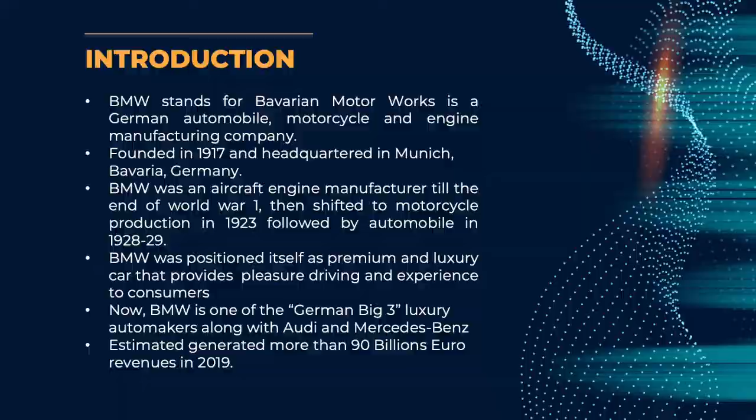BMW stands for Bavarian Motor Works, a German automobile, motorcycle and engine manufacturing company. It was founded in 1917 and is headquartered in Munich, Bavaria, Germany.

BMW was an aircraft engine manufacturer till the end of World War I, then shifted to motorcycle production in 1923, followed by automobiles in 1928. BMW positioned itself as a premium and luxury car brand that provides pleasure driving and experience to consumers.

Now, BMW is one of the German big three luxury automakers along with Audi and Mercedes-Benz, and is estimated to have generated more than 90 billion euros in revenue in 2019.

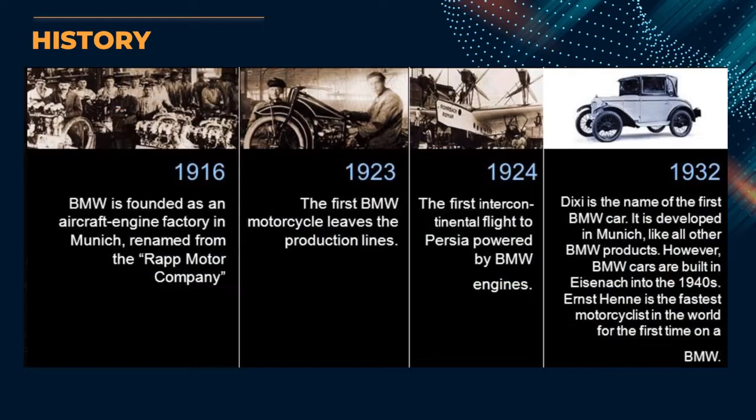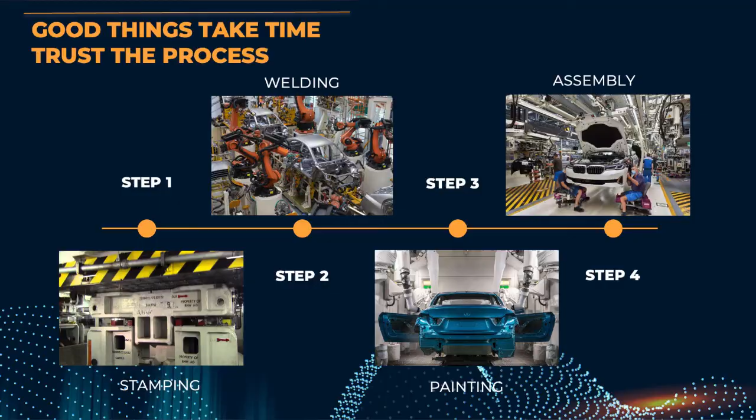The press shop marks the beginning of an automotive production process. Here, the sheet metal parts for the bodywork are cut precisely and stamped by a mechanical press.

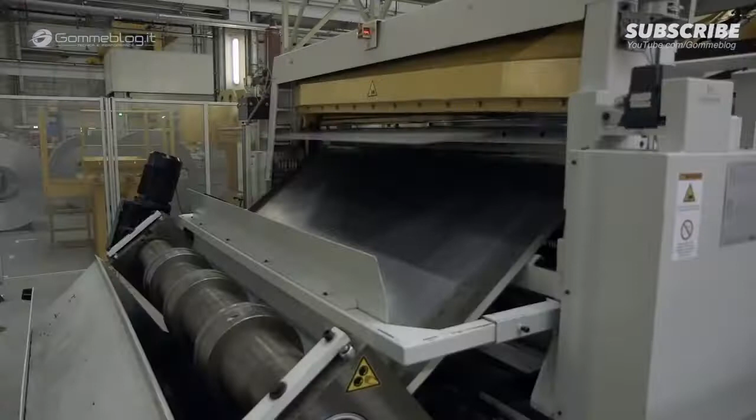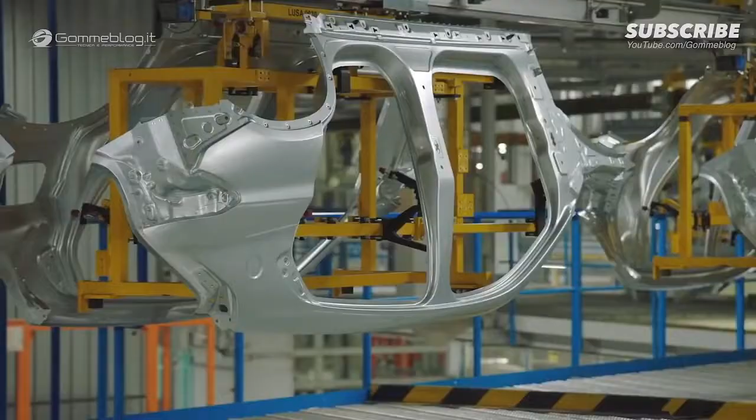These parts will form side frames, doors, hoods and roofs, which are later added into the main frame of the car. Once the frame is created and the parts are ready to be assembled, the car will be loaded into a production line.

As the car travels along a moving assembly line, robots attach parts to the car using manufacturing techniques such as welding, soldering, screwing and gluing. This process takes almost 18 hours to complete.

Next, the car frame will undergo a detailing process. This includes cleaning, layering chemical formulas, and painting for protection against corrosion and scratches.

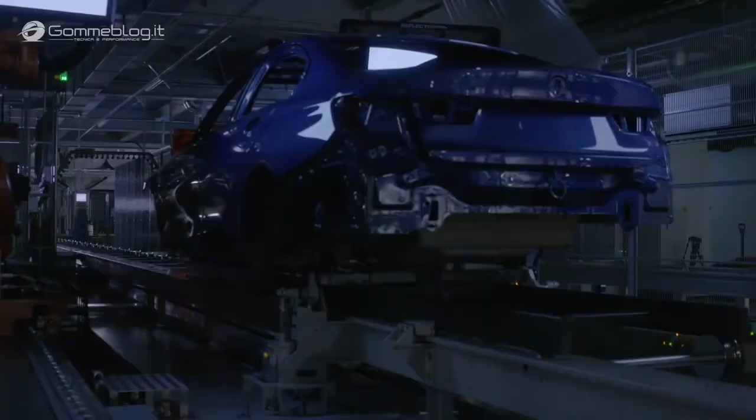Before the final stage of production, the car frame will undergo quality control to make sure all standard requirements are met.

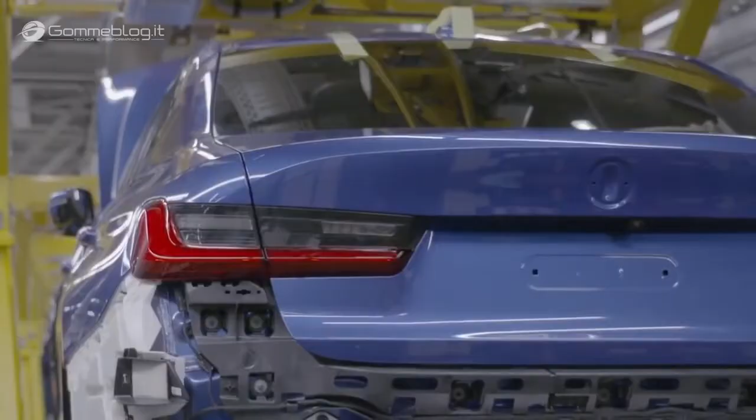The final process is assembly. Here, the major components are installed, such as the engine, seats, axle, exhaust system and many more.

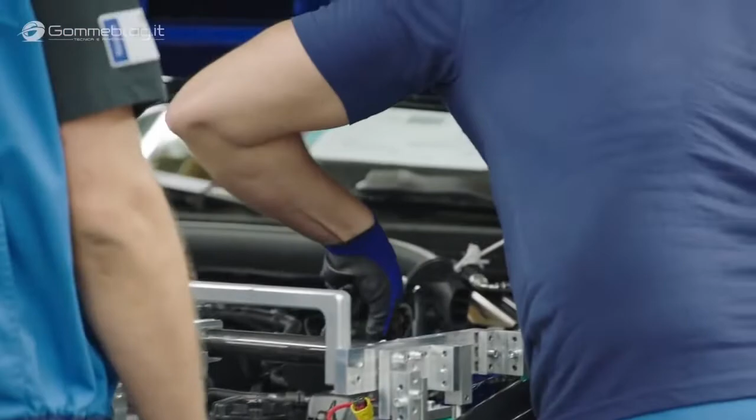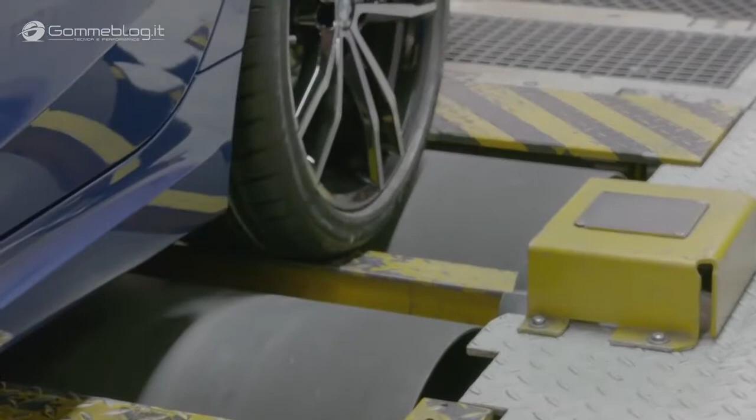Lastly, the car undergoes final quality control where every component is inspected, including minor details such as horn, light beams and others, before being released. The proverbial sheer driving pleasure is essentially determined by the end of this process.

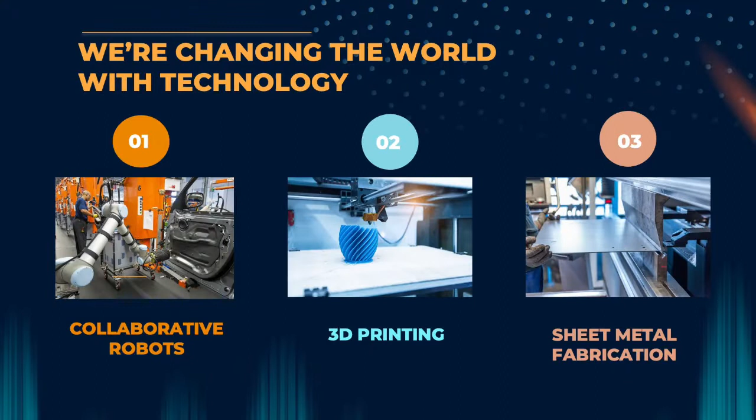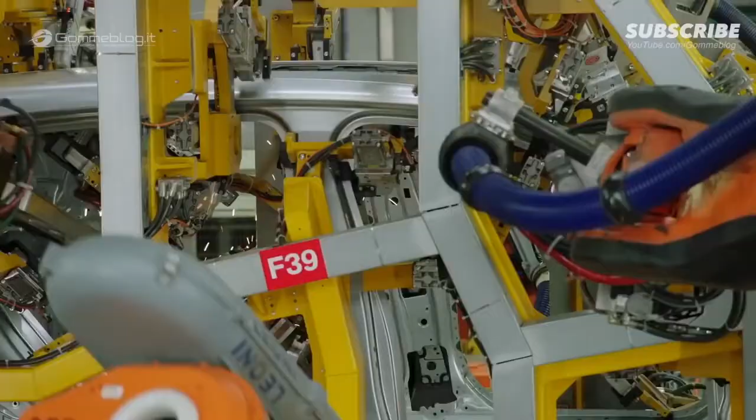One of the technologies employed in BMW manufacturing is the collaborative robot. Advantages of using collaborative robots are convenience and safety precaution for automotive manufacturing. Not only does it reduce manufacturing time, leading to lower production costs, but it also prevents human accidents while performing dangerous and heavy tasks.

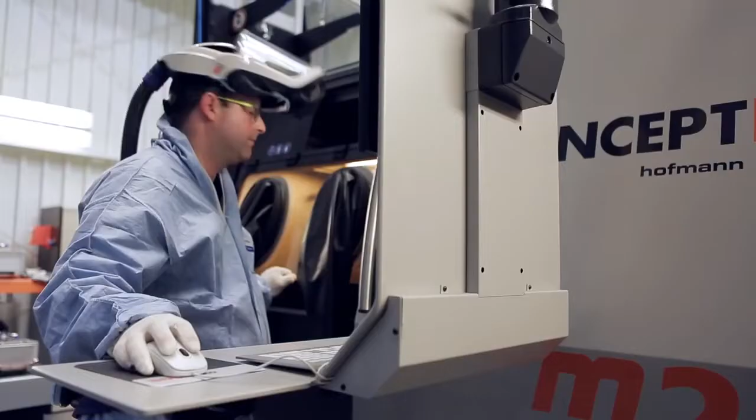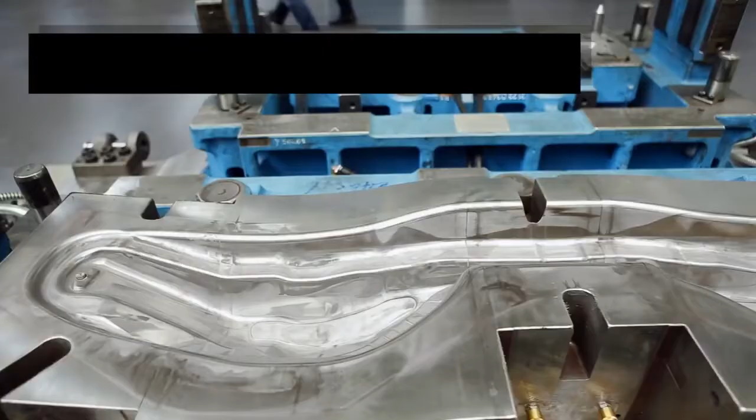Second is 3D printing. Additive manufacturing processes are used to create 3D printed objects. An object is created in an additive process by laying layer by layer until it is complete. Each of these layers can be seen as a cross-section of the object that has been thinly sliced.

Lastly, sheet metal fabrication. Sheet metal fabrication is used to turn flat aluminium or steel sheets into metal pieces or products by cutting, perforating, bending, and assembling.

This technology is automated and applied in car modification to sustain and satisfy customer needs. Sheet metal fabrication is used because of its plasticity and elasticity. Thus, by using this technology, it improves the performance and safety of the components.

The aim of BMW's design concept is consciously shaping a vehicle in such a way that this interplay creates an impact and dynamism.

The key concept of BMW car design is to create the ultimate driving machine. With that in mind, people are not only attracted to the BMW brand because they produce great cars, but also because of their way of doing things.

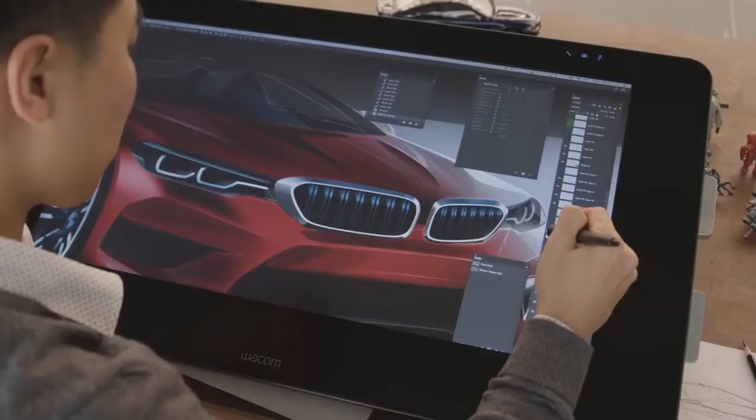What makes BMW exclusive and appealing lies in BMW's design concept, which is built for performance and longevity.

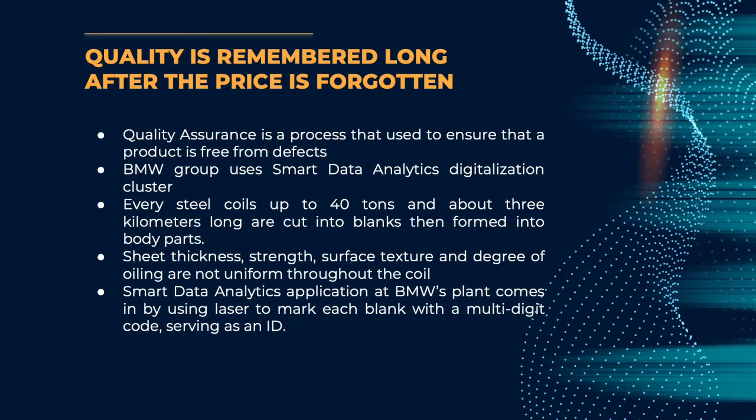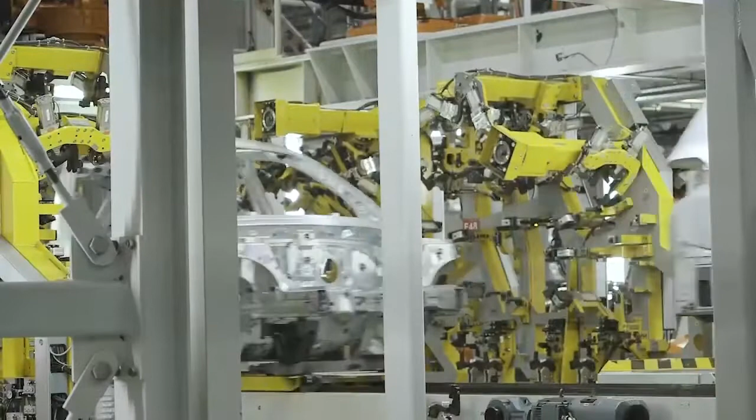Quality assurance is a process used to ensure that a product is free from defects. So, in BMW Group, to make sure that quality of a product is in top condition, they use smart data analytics digitalization clusters to analyze the data selectively and enhance its production system.

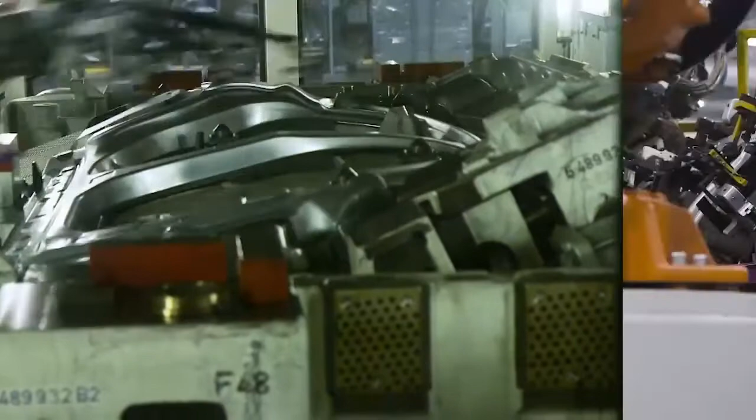The results of intelligent data analysis contribute significantly to the improvement of quality in all areas of production and logistics.

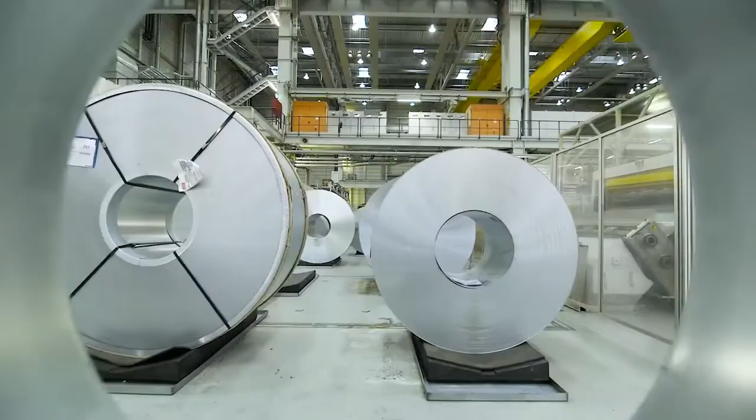For instance, in the pressing shop department, every steel coil, up to 40 tons and about 3 kilometers long, is cut into blanks, then formed into body parts.

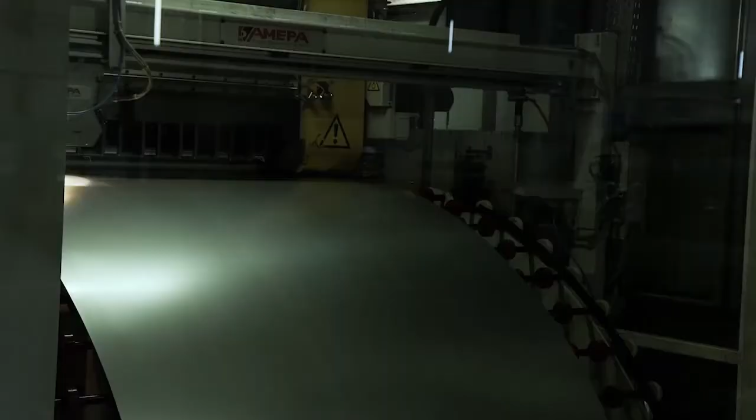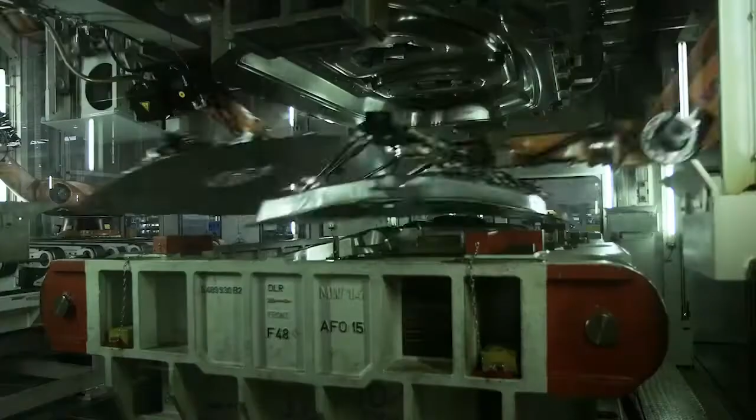However, sheet thickness, strength, surface texture, and degree of oiling are not uniform throughout the coil. As a result, deviations from the target can cause cracks in the body when they are put under a lot of stress during the forming process.

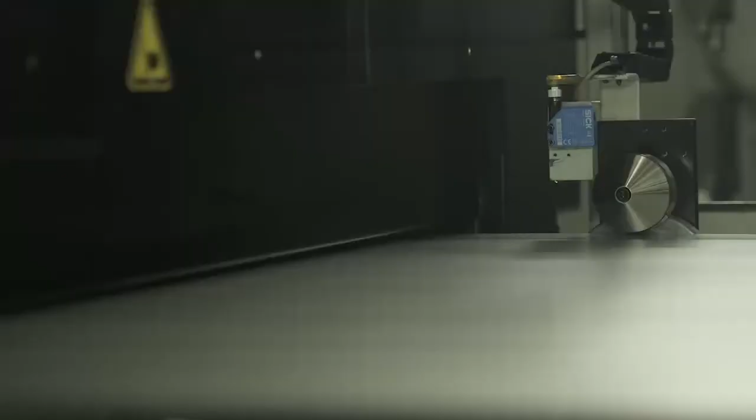Hence, this is where the smart data analytics application at BMW's plant comes in, using lasers to mark each blank with a multi-digit code serving as an ID.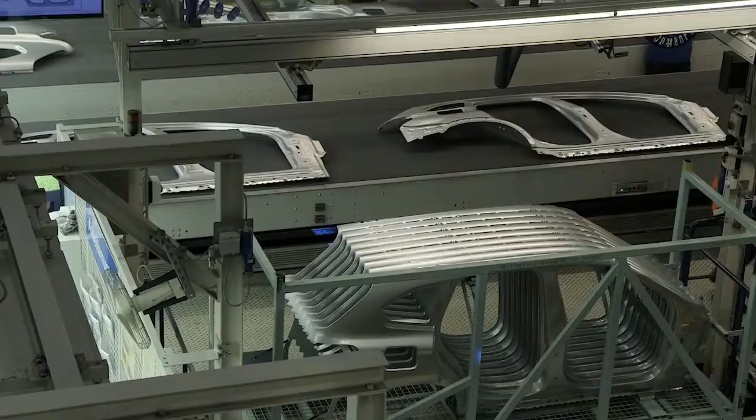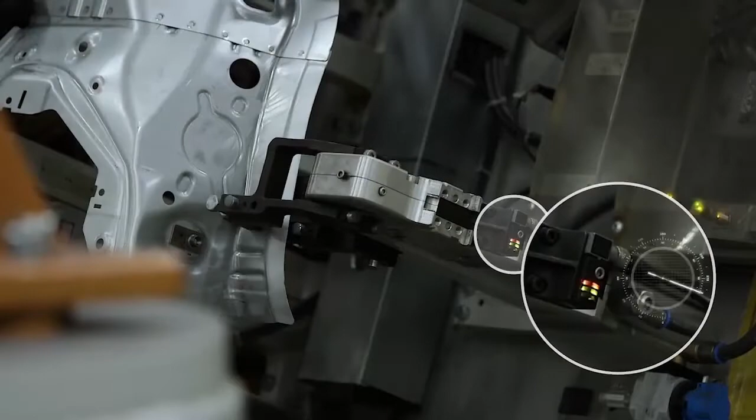The ID, which contains a control command, can instruct the machine to insert additional oiling to the blank before forming, if needed. So, by implementing smart data analytics, we can achieve quality assurance.

I would like to share some products that have been produced by BMW company, which is the BMW 7 Series sedan.

BMW 7 Series sedan stands for self-assured presence, exceptional performance and maximum comfort. The BMW 740LE, powered by a newly developed BMW TwinPower Turbo 6-cylinder petrol engine and with xDrive as standard, is quite simply created for assuming the leading position.

The emotive language of the elegant design, together with that special atmosphere of well-being in the interior, thanks to the supreme quality of detail, individual styling options and technical innovations, make it more of an epitome of the BMW luxury class. Smoothness meets exclusivity, luxury meets performance.

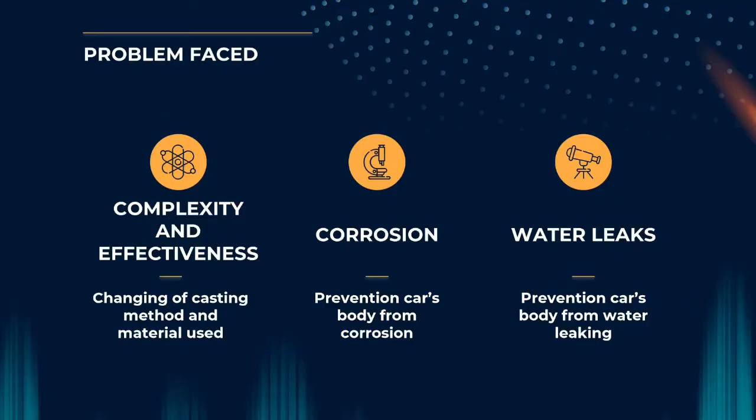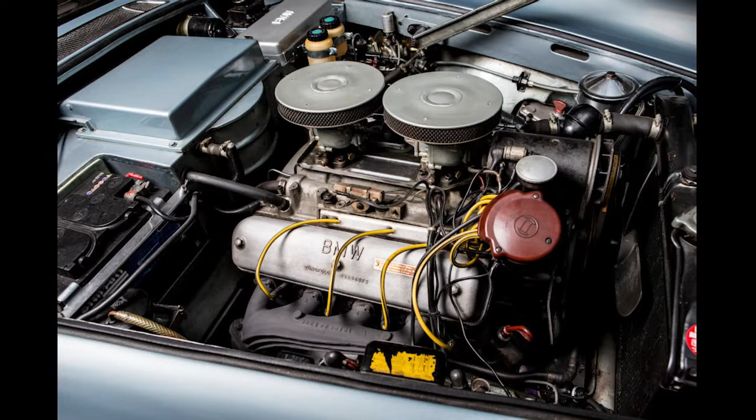So the first problem is complexity and effectiveness. As the technology becomes advanced, the engine specs also need to be upgraded to match the specifications needed. As for the weight of the engine, BMW needed to reduce the weight to achieve better overall vehicle weight. To do so, they reduced the volume of the engine components by hollowing certain sections, which resulted in increasing the complexity of the parts design.

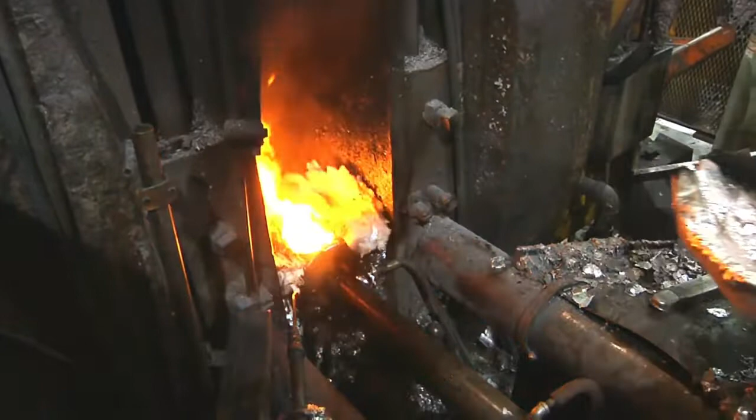At that time, they were using the die casting method to produce the engine's parts, but die casting is limited to a certain level of complexity, as we all know. They then changed the method and used sand casting to comply with the demanding design specifications.

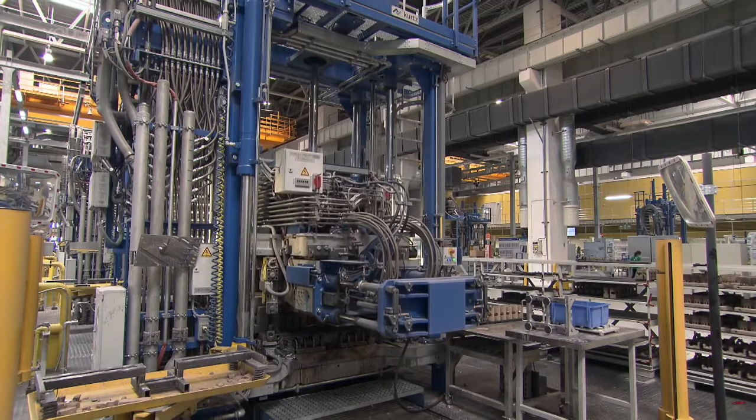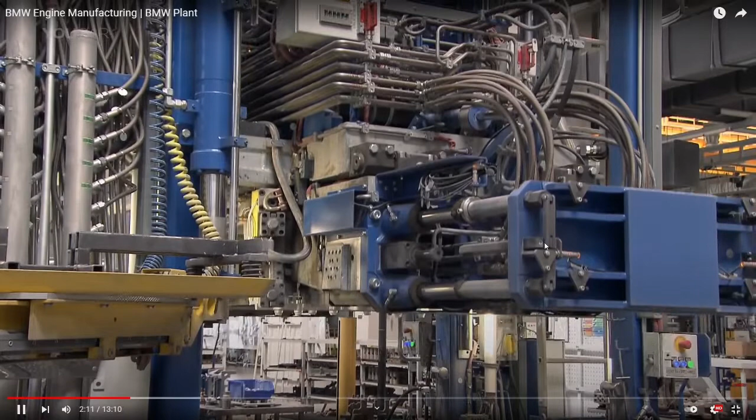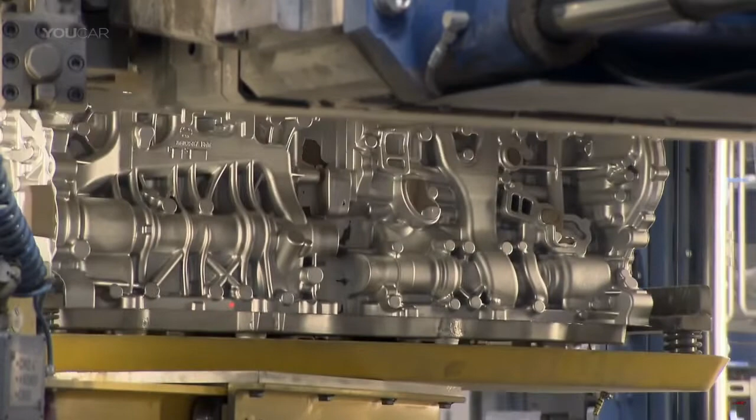Although sand casting is costlier than die casting, they can cover the issue as the finished product from sand casting needs much less machining. They also changed the material used for the engine block from grey cast iron alloy to aluminium alloy or magnesium aluminium alloy, for better characteristics in terms of internal stress, damping absorption, wear resistance, thermal conductivity, casting features, corrosion resistance, high strength, and rigidity.

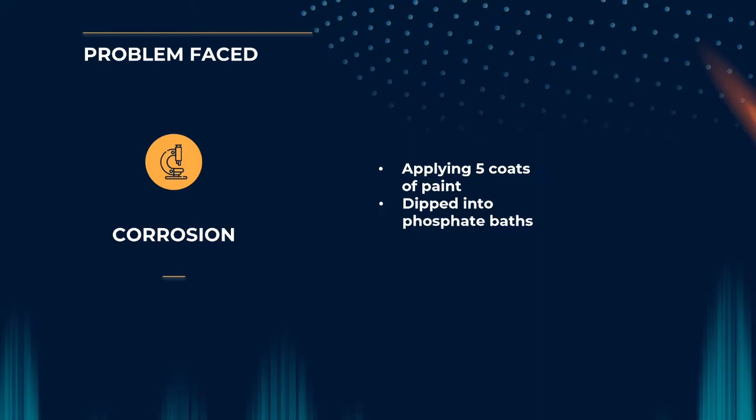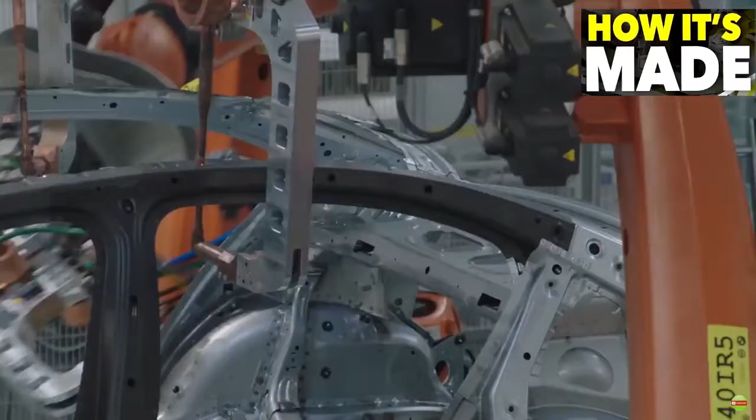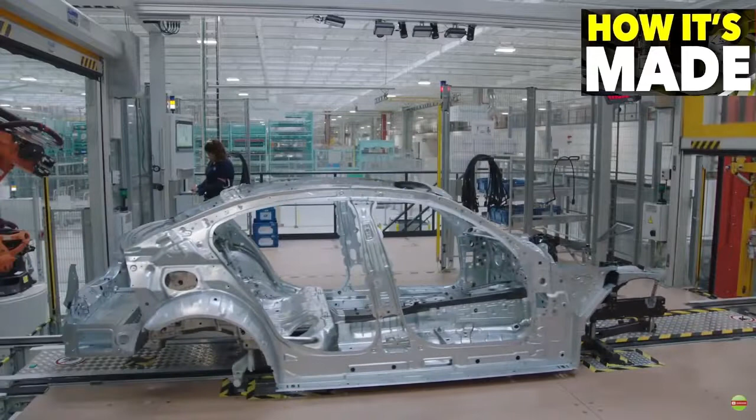We move on to the next problem. Our second problem is corrosion. As I mentioned before, when using metal compounds, the material has a high tendency to corrode depending on the compound used. For the engine, they use aluminium alloys and magnesium aluminium alloys, partly because they have better corrosion resistance than other compounds like grey cast iron alloys.

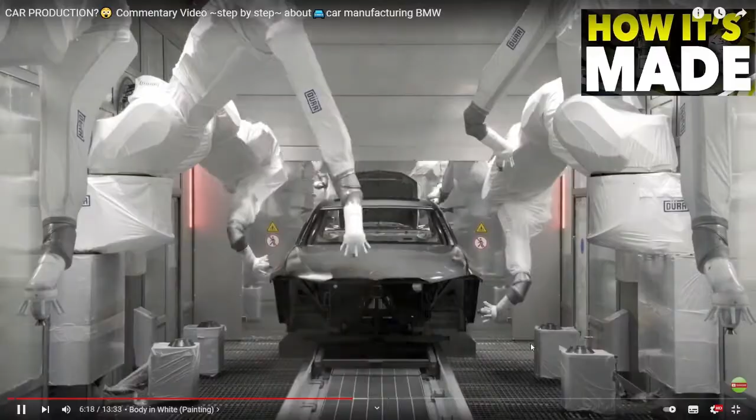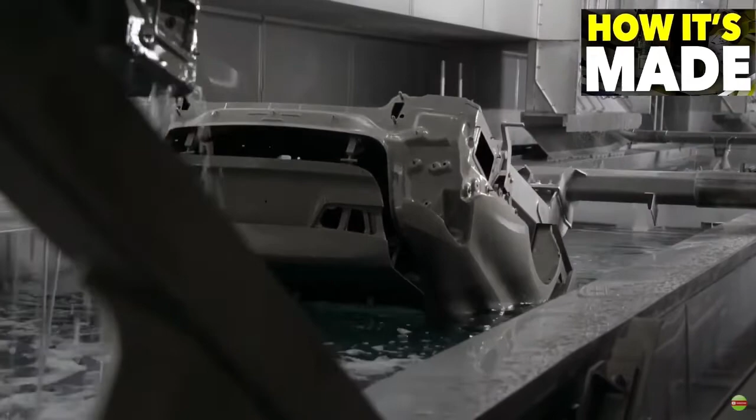But for the body of the vehicle, they use aluminium sheet metal. By using this metal, the company can easily shape it according to their desired design. However, the material has tendencies to corrode, at least that's what BMW assumes. So to further enhance the vehicle body's corrosion resistance, BMW applies 5 coats of paint on each vehicle body, while also dipping it into a series of phosphate baths, which surely improves the vehicle body's resistance to corrosion.

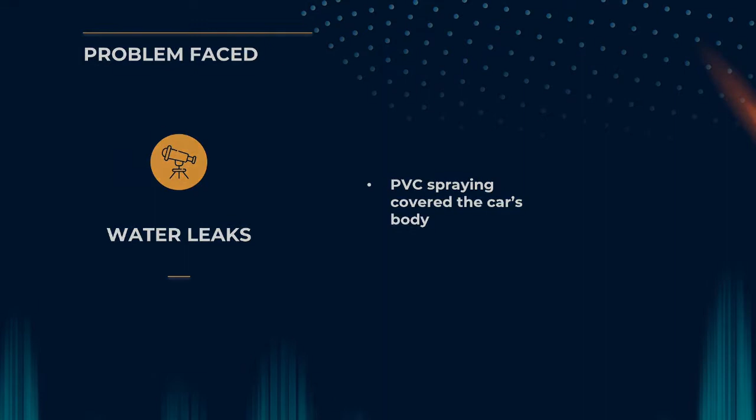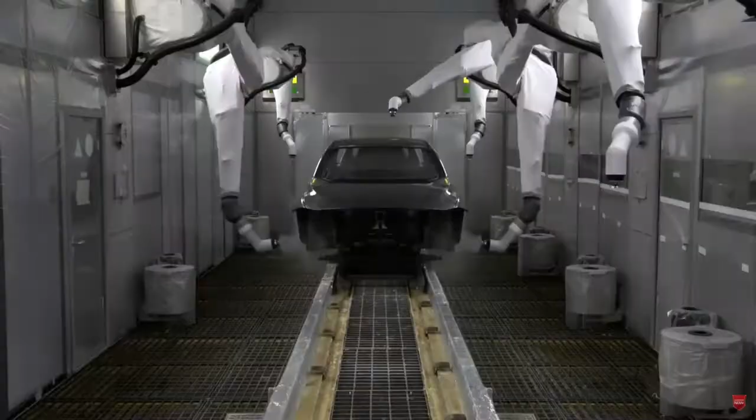That's how the detail of workmanship is produced by BMW. Thank you.

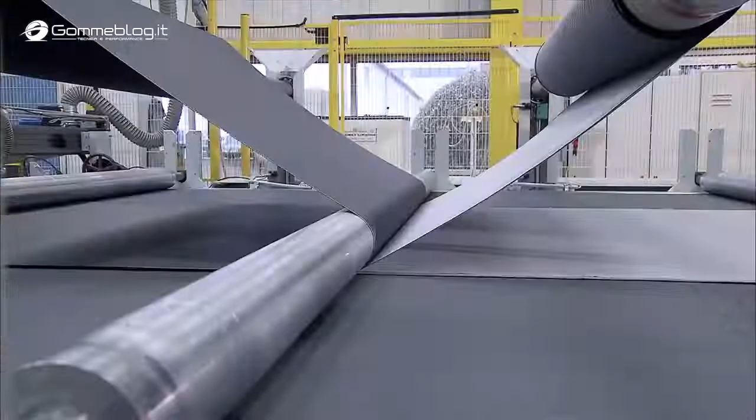As mentioned previously by Shakir, engines built by BMW are hollowed in certain sections to reduce the overall weight of the vehicle. This weight problem can be further aided by reducing the total weight of the chassis and mechanical parts in the car. This is done using carbon fiber reinforced polymer, a lightweight material that can replace most steel parts in the car, as its strength and stiffness surpass steel parts.

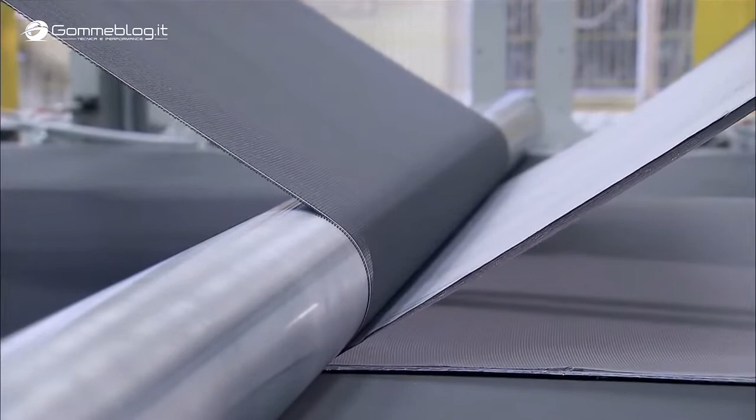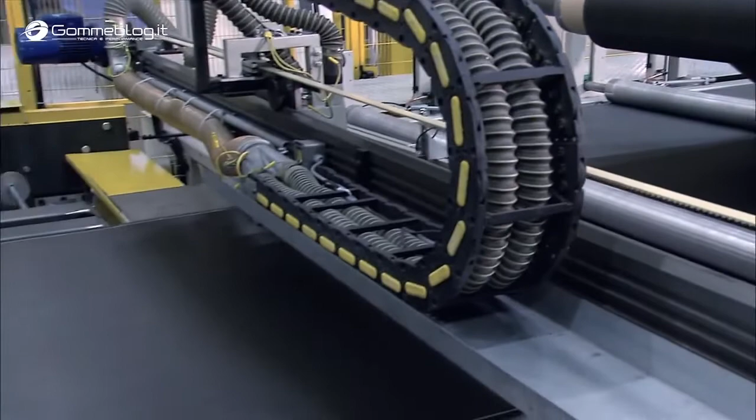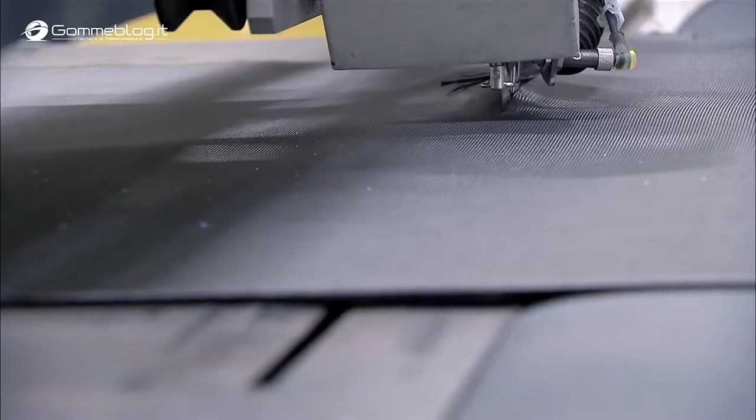This is already done by BMW on their high-performance M-series models for roofs and aero parts. However, this feature can be applied on the heavy 7 Series for its roof, fenders, bumpers, doors, side mirrors, and for mechanical parts such as drive shafts, axle shafts, and wheels. As a bonus, this also solves the corrosion problem, as carbon fiber reinforced polymer does not corrode at all, unlike steel. For water leaks, a new sensor technology can be used during the quality control process of the car.

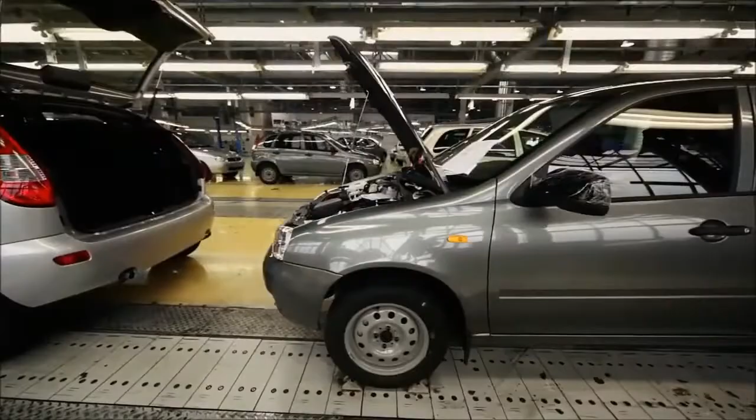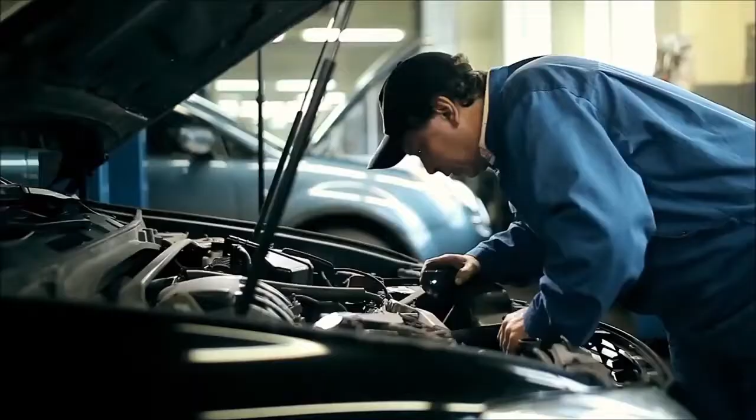Produced by Smartrac, the sensor tadpole can detect water leaks accurately during high-pressure leak tests, when its paper tail absorbs water and transfers moisture level information via capillary action to the tag. The ultra-high frequency RFID tag then transmits the data to the RFID reader, which pinpoints the exact sensor tag exposed to the water leak. This makes it easier to test water leakage during the quality control process.

The body will be fitted with 6 to 14 sensors around places with a high chance of leakage. This technology will save cost, as manual leak inspections are costly and time-consuming.

There are a few applications of smart data analytics. First is laser marking of body parts. Steel coils that are several kilometers long are cut into blanks in the press shop and then formed into body parts. However, sheet thickness, strength, surface texture, and degree of oiling are not uniform throughout the coil. This deviation can lead to cracks in body parts during the forming process.

By taking advantage of this system, a laser marks each blank with a multi-digit code, and this mark holds all the data about that individual blank, which can be acquired through the system. By fine-tuning press parameters according to the characteristics of each blank, the number of scrap parts is lowered, there's better utilization of the coil material, and reduced system downtime for fault analysis.

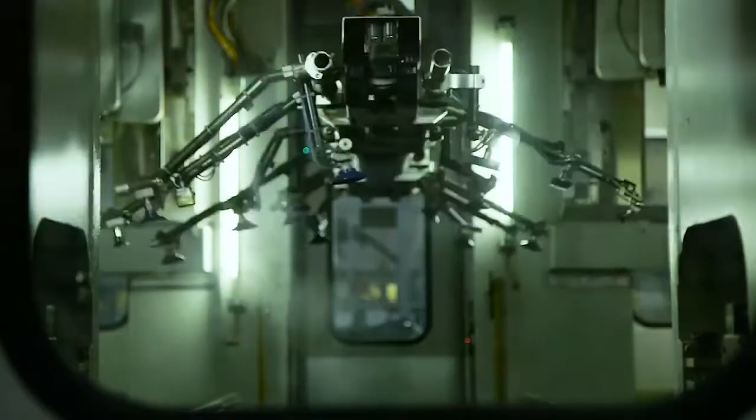Secondly, predictive maintenance for the body shop. Predictive maintenance ensures reliable operation of a large number of systems and predicts breakdowns before they occur. Data-based solutions for predictive maintenance are used at various stages in car body production to predict wear in robots. Sensors in welding tongs signal ahead of time when defects or quality problems are likely to occur. Wide-scale sensor monitoring also improves the reliability of the electrical drives used in a variety of systems. Robots and control technology are fitted with sensors, allowing maintenance staff to analyze the data and draw the right conclusions.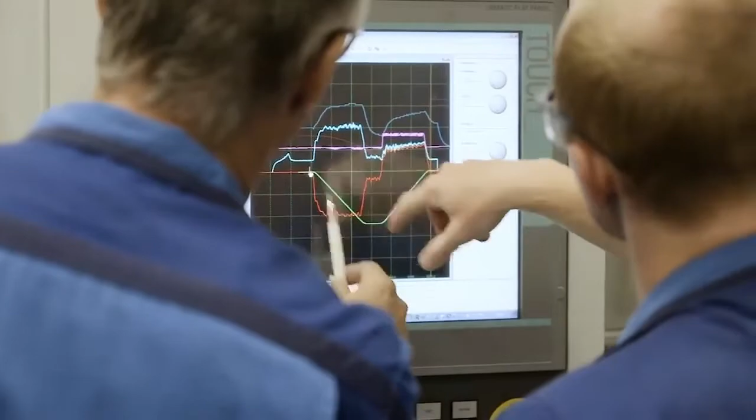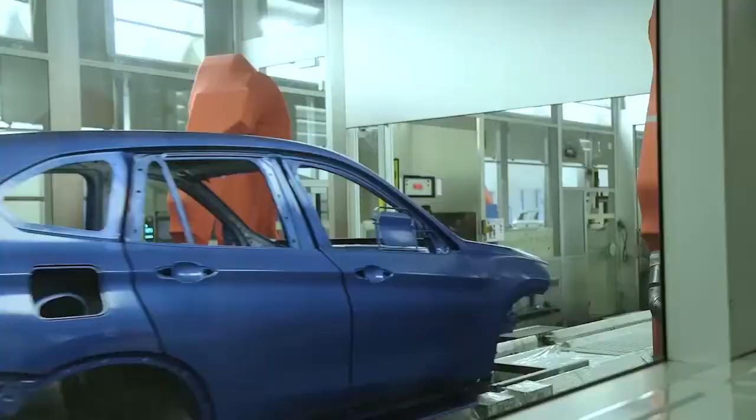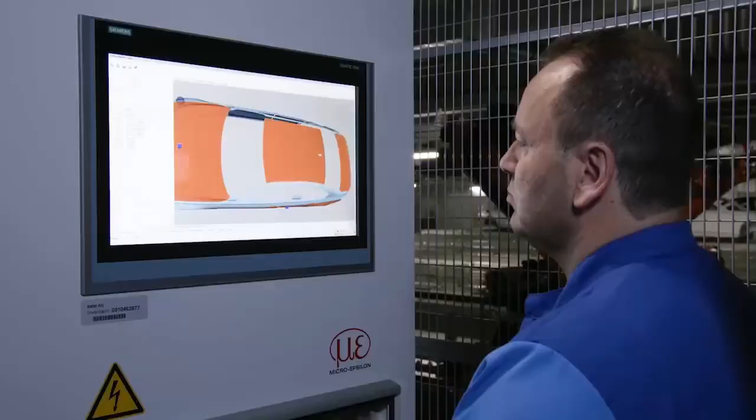Thirdly is faster data and error prevention. Based on the data recorded, analysis of the bolting curve process provides important insight for systematic monitoring of the bolting system and parameters. When implemented, these findings create a closed loop of continuous improvement. With this information, the BMW Group will train employees for preventive quality work.